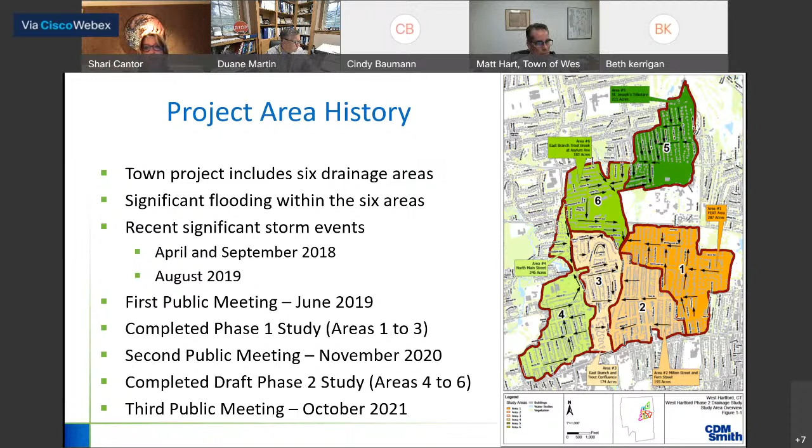This is just the summary of phase 1, which I already presented to you, and I believe most of you were on that presentation. These are areas 1, 2, and 3, and we came up with recommendations here. We conducted field investigations, did stormwater modeling, evaluated alternatives using that modeling, and came up with recommendations.

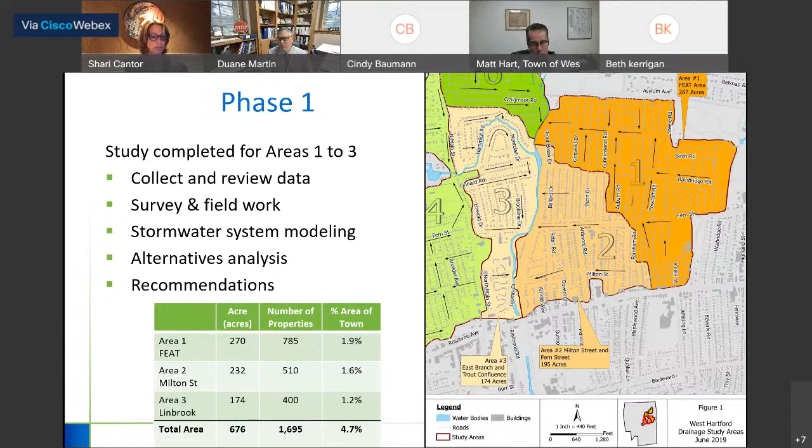Now we're on to phase 2, doing the same scope. We completed the field survey, the modeling, the evaluation of alternatives, and developed recommendations. This phase includes 3 areas.

Area 4 is the area down here to the left, and it includes North Main Street, running down the easterly side of it. It also includes Arundel Ave, Whitman Ave, and Brace Road to orient yourself.

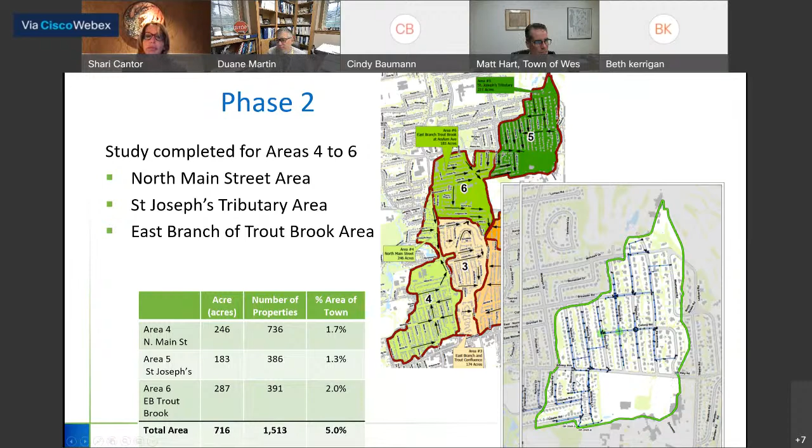Area 5, up in this area, is the St. Joseph's tributary, with Albany Ave running pretty much through the middle of it. It goes north to Mohawk Drive and then south to... I'm forgetting the name of this school, but it goes down towards Lola.

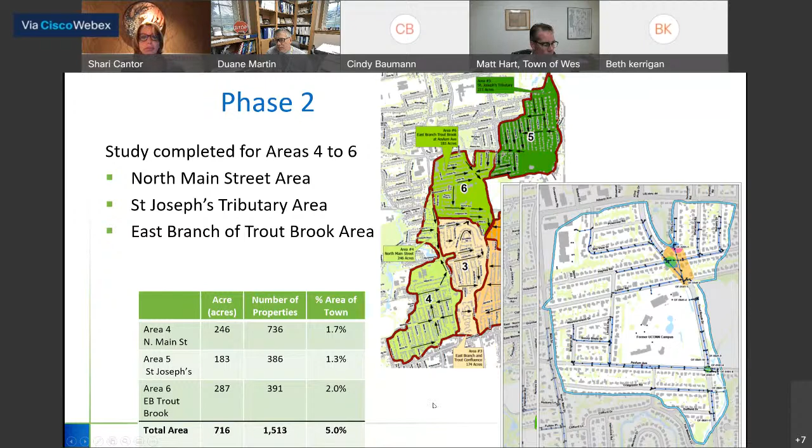Area 6 is from Asylum Ave up to Albany Ave, and it includes Trout Brook Drive, Lindy Lane, Haynes and Lola, and Asylum and Craigmoor. Just to orient yourselves, those are the 3 areas we're focusing on today.

I'm going to go over the existing conditions for this phase 2 study, starting with area 4. Actually, this is area 6. We did the drainage model development, similar to phase 1, performing supplemental survey.

There are 15 drainage systems that discharge to Trout Brook, and this area has a lot of small systems. The red triangles show where they discharge to Trout Brook, the yellow lines represent pipes, and the green junctions typically occur at manholes.

We modeled the 10-year design storm, which has a 10% chance of occurring in a given year. We also validated the models with historical storm events and documented flooding provided by the town engineering department and emergency services.

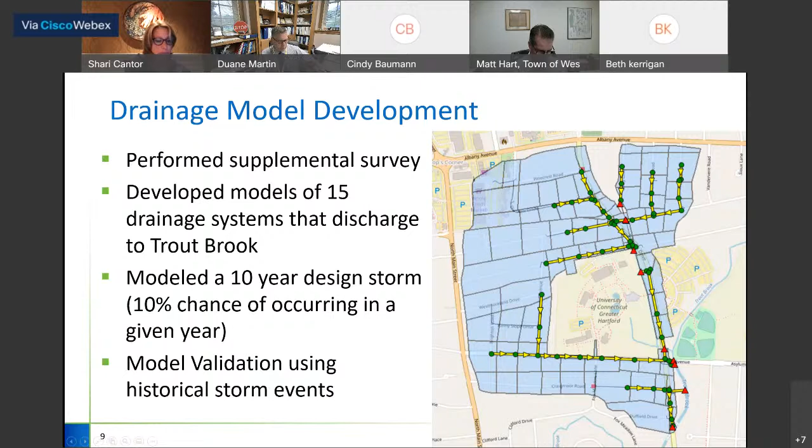Overview of Area 4: it's a total of 249 acres with 4 systems. The North Main Street system is up here, north of where Trout Brook crosses the roadway. Then we have the Linbrook Road system.

The Linbrook system is tiny, including only about 4 catch basins, and it discharges to Trout Brook just east of North Main Street. Then we have North Main Street South, which runs south of Trout Brook. The biggest system in Area 4 is Arundel Ave.

All of this drainage system piping runs in a northerly direction towards Trout Brook. In this figure, going forward, anytime there's a red circle, it means at that node in the system there is flooding.

There is one flow split to mention, where flow comes into usually a manhole and then splits, having the ability to flow from one system to the other. That is identified by the square here, and it happens to be at the American School for the Deaf.

The flow comes down the Arundel Avenue system and splits, continuing down Arundel Avenue but also splitting to the North Main Street South system. There are a few splits as we go along — these are just areas to note, and typically there's modeling complexity at that location.

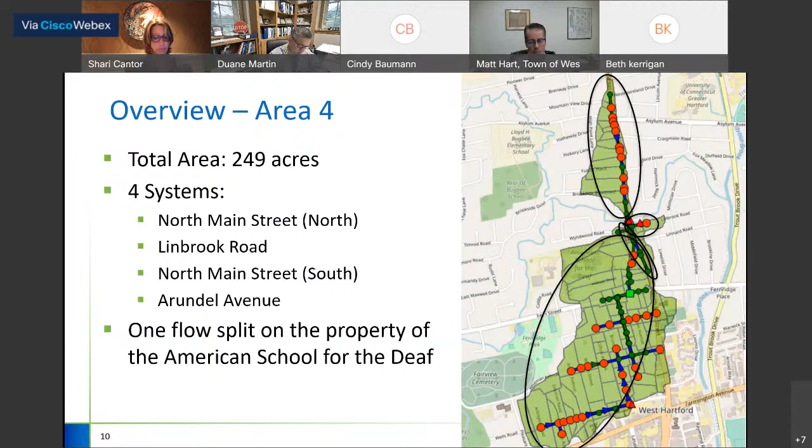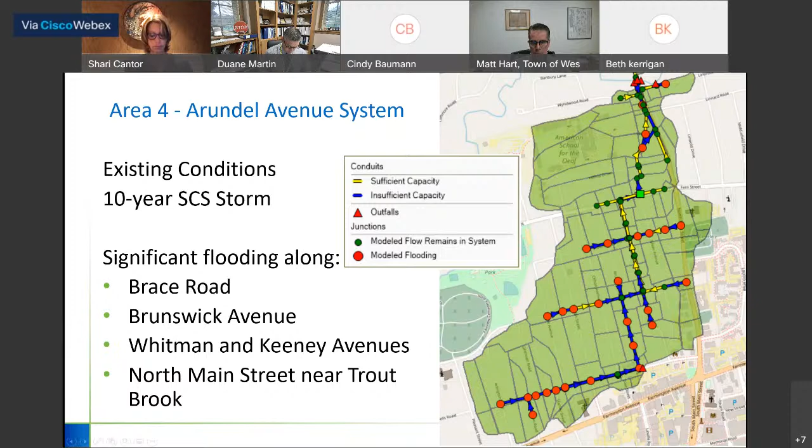So this is the Arundel Ave system. I have noted where there's significant flooding based on the model. As mentioned before, anywhere there's a red dot, it means at that node the water is not in the system—it's actually on the surface. You can see there's quite a bit of flooding within this system, a significant amount along Brace Road, and then also Brunswick Ave, and Whitman and Keeney. A lot of the side streets that are tributary to Arundel Ave have flooding within this area.

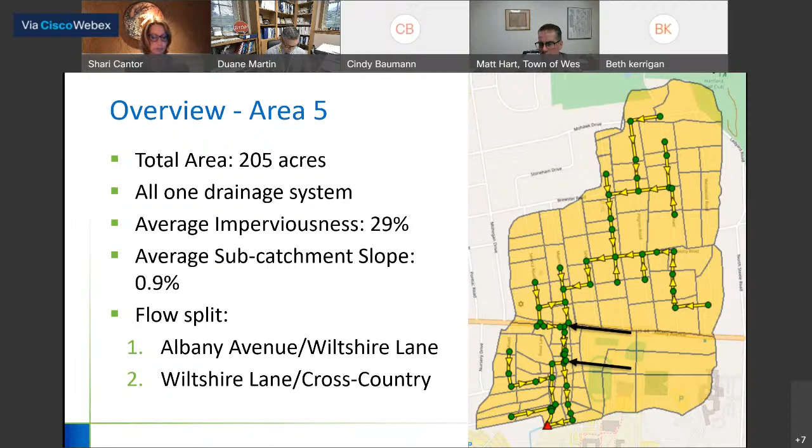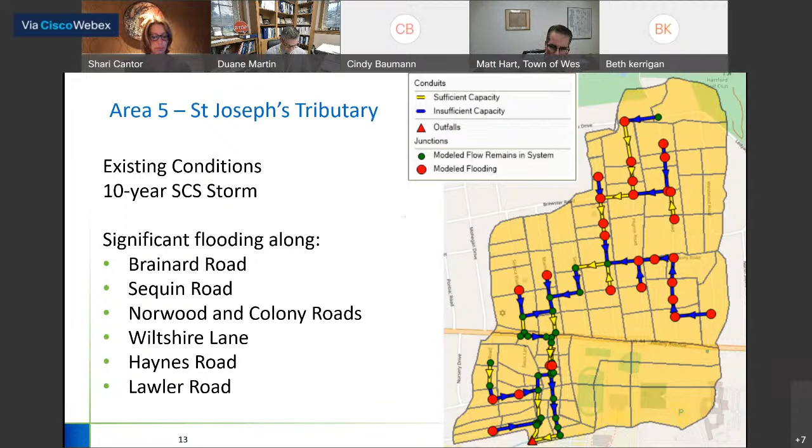So in this area, St. Joseph's Tributary, there's a significant amount of locations where the model showed flooding. Once again, all the red dots are where the water is not contained within the system, and there's flooding documented in the model.

Then Area 6, this is the one that surrounds the University of Connecticut campus. It has Trout Brook Drive running from Albany Ave down towards Asylum and then keeps going a little farther south. There's 10 drainage systems in this area, and this one also has a flow split—another location on Trout Brook Drive where flow splits, and there's actually 2 outfalls for one system.

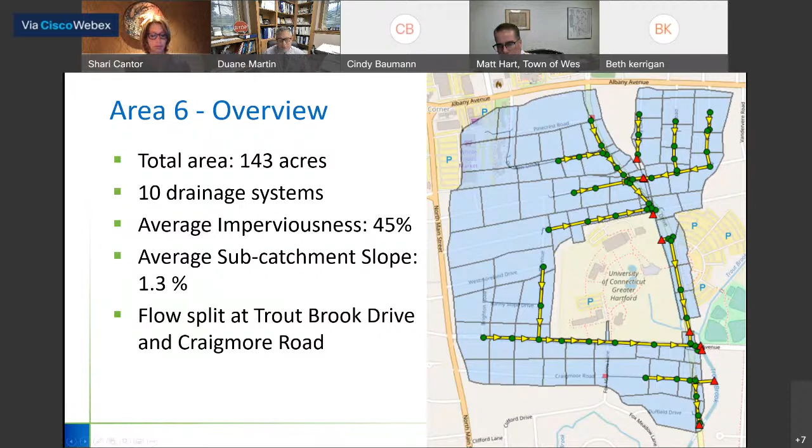This system has a lot of smaller systems and doesn't have as much significant flooding as some of the areas within Area 1 and 2, areas 4 and 5, but there still are a significant amount of red dots, or locations where there is flooding.

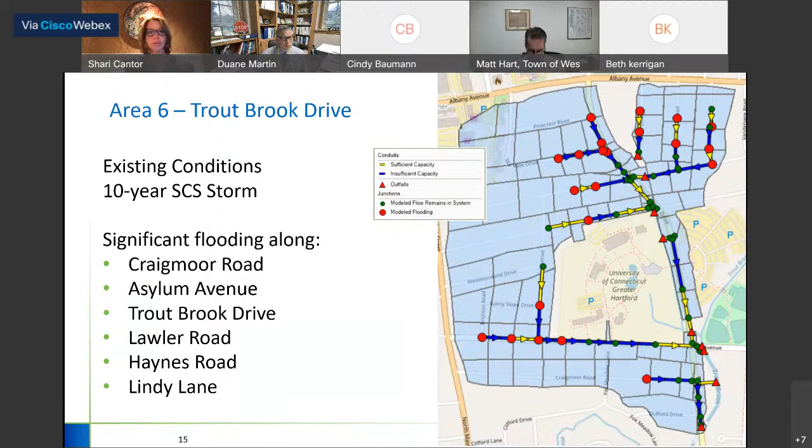Also, I hadn't mentioned, but the yellow pipes are ones that have sufficient capacity, and the blue pipes are ones that have insufficient capacity, so they do not have capacity to carry the flow coming to them.

So now I'll go over areas 4, 5, and 6. All the outfalls and systems within each area are shown in this table. Those that are in bold, though, are the ones that did not have capacity during either the 10-year storm or the 3 historical storms that we modeled. Those that have check boxes to the right are the ones that we then developed recommendations for. The ones that are not bold or do not have check boxes have sufficient capacity and do not currently have any recommendations.

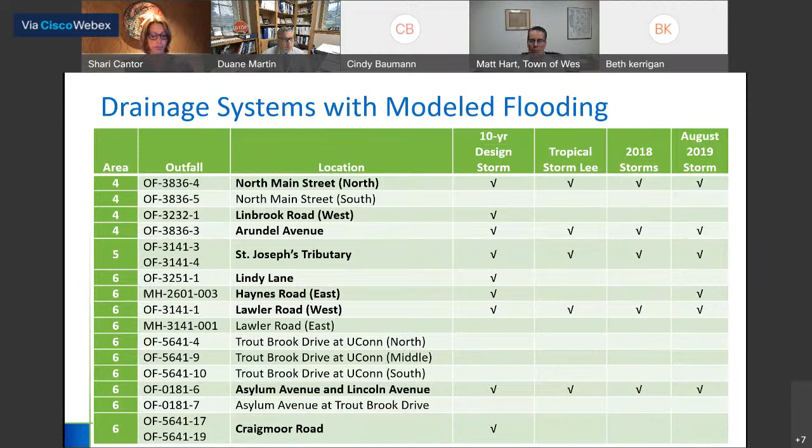So the other thing we looked at for all 3 systems is private inflow removal. As we did in phase 1, we're looking at houses that need a connection for their private inflow so that they can connect it to the drainage system. Within these 3 areas, 4, 5, and 6 for phase 2, there's approximately 600 total buildings that have been identified as private inflow disconnections—those are buildings that would need to be disconnected from the sewer and then put into the drainage system. It's approximately 38% of all the properties within this phase 2 area.

Just to note, in areas 1, 2, and 3, MDC had already conducted the building inspections and already knew all the properties that needed to be disconnected. Within areas 4 and 5, there are portions that have not had building inspections conducted by MDC, so we made an assumption based on percentages in other areas to come up with the anticipated total number of buildings that need to be disconnected.

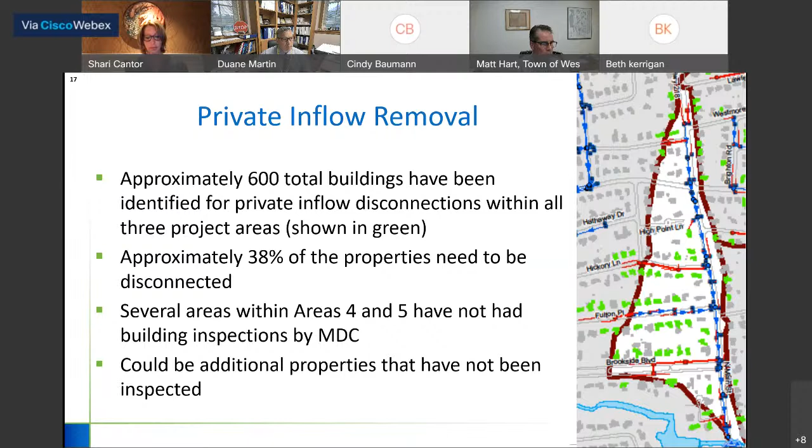And in order to disconnect them, there's a collector drainage system that needs to be installed. This kind of shows you, they've already done this in the Greenhurst Road project. And the blue is actually the drainage system.

What they do is connect to the drainage system with collector drains and then private services. So this is a collector drain on Westbrook Road, which then provides connections for number 44, 46, and 48. And then there's also drain extensions.

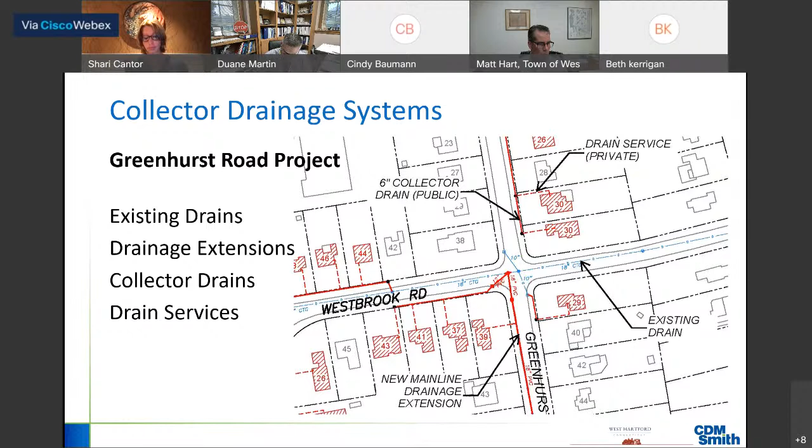In this example, Greenhurst does not have any drainage system down it, so drainage extensions would be provided so that the buildings can tie into those. So collector drainage systems include both drainage extensions and collector drains so that private homes can connect to a drainage system with their sump pumps and roof leaders.

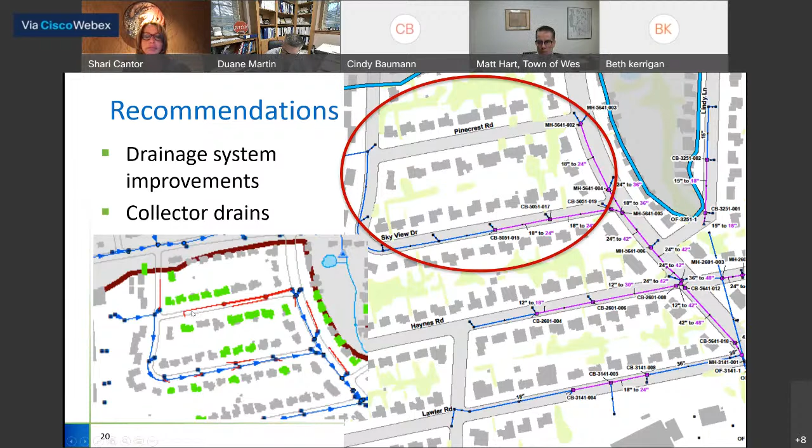For the prioritization, we came up with a tiering system. There are 3 tiers. Tier 1 is the high priority, and these are areas with documented flooding and also modeled flooding during the design storm, which is a 10-year design storm or a 10% occurrence in any year, and also the historical events.

So if you had all 3 of those — documented flooding, insufficient capacity during the design storm, and insufficient capacity during the historical events — then the recommendations were put into a high priority.

And tier 2 is a moderate priority. These are the ones that had modeled flooding only. They didn't have any documented flooding, just modeled flooding during the 10-year and the historical events.

And then tier 3 is the ones that just had modeled flooding during the 10-year design storm. They did not have any documented flooding and did not have any flooding during the historical events. The historical events we modeled were smaller than the 10-year design storm, so that's why they did not show any flooding in the modeling during those storm events.

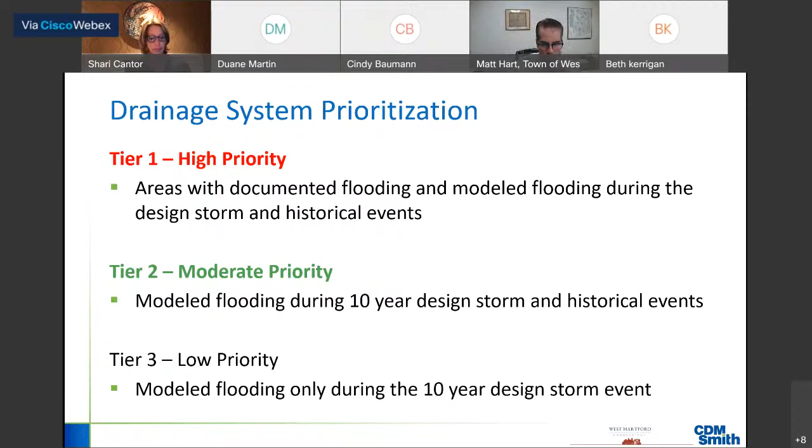So these are the drainage systems with modeled flooding. I had shown you this before, but those with the checks are the ones we're going to go over. North Main Street, Linbrook, Arundel are all in area 4, and then area 5, the large system, St. Joseph's Tributary. There's approximately half of them in area 6 as well: Lindy Lane, Haynes Road, Lawler Road, Asylum, and then Craigmoor.

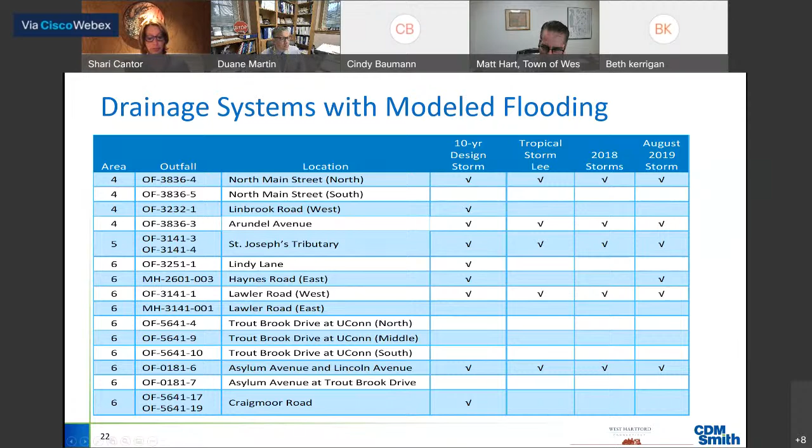So out of those that I just mentioned on the last slide, those that were provided with recommendations are on this slide, and they are prioritized with tier 1, tier 2, or tier 3 based on their performance and their modeled and documented flooding.

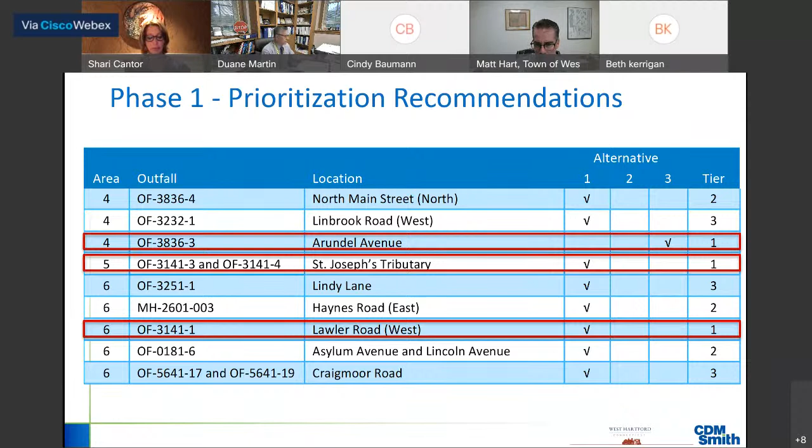So what I'm going to go over, just to pick a few, is there's 3 of them that I'm going to show you the recommendations for and what is proposed in each. I picked one from each area: in area 4, we'll go over Arundel; in area 5, we'll go over St. Joseph's Trib, the large one; and in area 6, we'll go over Lawler Road. Actually, I'm starting with that one in area 6.

So area 6, this gives you an example. You've seen this slide a little before, but this outfall is down near Lawler Road into Trout Brook. On this slide, you can see the drainage network is shown, and anything in blue has sufficient capacity and does not require any upsizing of pipes.

But those lines shown in purple would be ones that were upsized. For example, on Trout Brook Drive here, this first one is an existing 18-inch, shown in black, but the proposed is a 24-inch, to give you an order of magnitude of the size differential from existing to proposed. The table on the left shows the total amount of pipe length as well as the different sizes and pipe length required for the Lawler Road system within area 6.

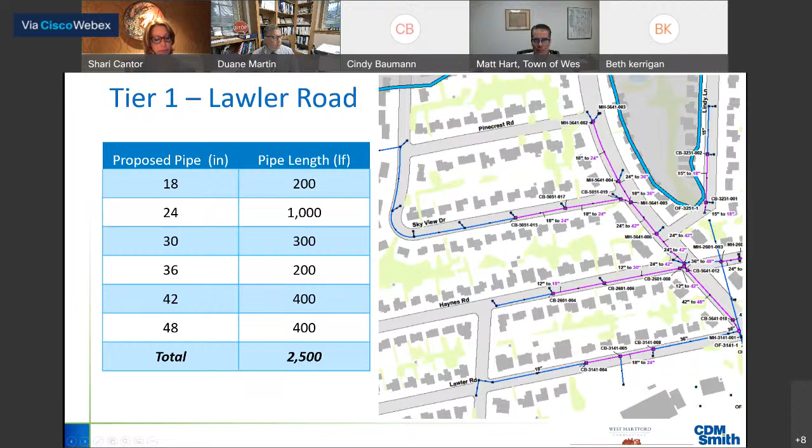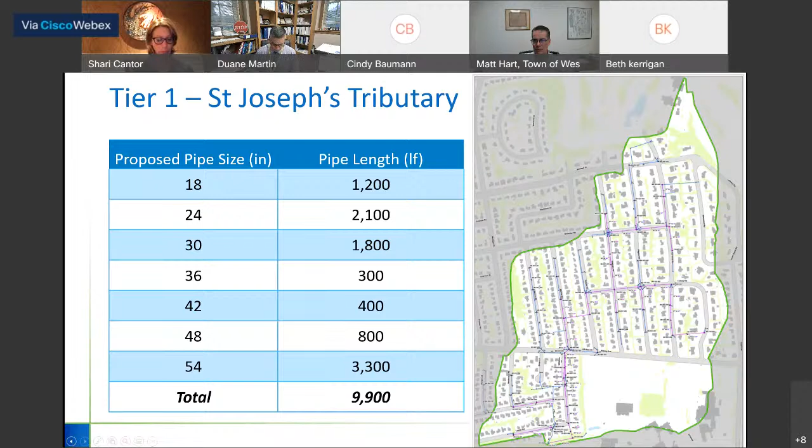And then I took the St. Joseph's Tributary, and I know this is harder to see because it's such a large system. But once again, this is Route 44, and then you have Wiltshire and Lawler Road down near the outfall. This goes all the way up and to the right, and then this is St. Joseph's School. So there are quite a few, and the majority of it is the trunk line. You can see the trunk line is in purple, meaning the pipe needs replacement, and then there are some feeder lines that come in from the side roads that are blue, which would not need replacing. So this area, St. Joseph's Tributary, this system has a total of 9,900 linear feet of pipe replacement, varying in size from 18 to 54 inch.

The last one I've used as an example is in area 4, the Arundel Avenue system, once again a very large system. This system and the St. Joseph's are the largest systems within this phase 2 study, and it's about the same amount of linear feet—10,000 linear feet. You can see Brace Road is down to the south here, and Arundel is in the middle, and this is North Main Street. This is the School for the Deaf, to give you an orientation. But the proposed recommendation, you can see there's blue pipes down here, this is the downstream end because the flow is going from south to north.

But there are quite a few pipes that are tributary to the trunk line. The trunk line runs down Arundel, so all these purple pipes that are tributary to the trunk line need replacing. There's also a lot of documented flooding more up in the Brace Road area and the upper part of the watershed. So this recommendation shows a diversion pipe down towards the river in this area, so we would divert the flow from the upper part of the watershed to the right, to an existing outfall on Trout Brook Drive.

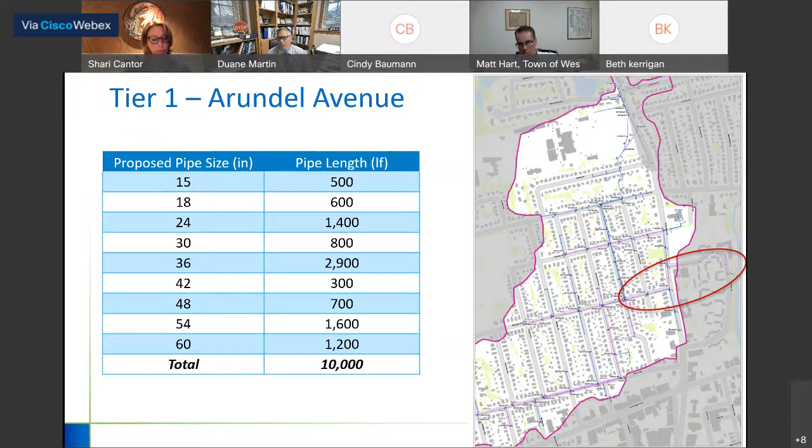So now I'm going to go over some costs, including both phase 1 and phase 2. Phase 1 is areas 1, 2, 3 that we went over about a year ago, and now we have phase 2, which is areas 4, 5, and 6. But I'll start with phase 1. Just to review, to show you what we're recommending for improvements in phase 1, these are areas 1, 2, and 3, listed here with the same kind of tiering system, ranging from tier 1 to tier 3. The total cost is shown at the bottom, $44 million.

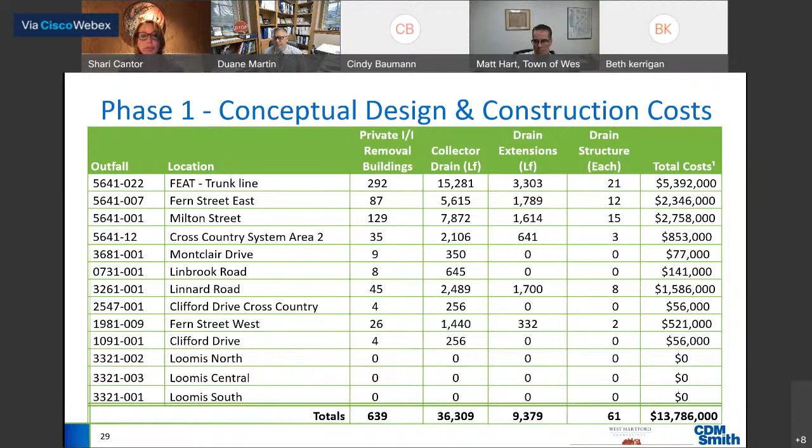This is for the design and construction costs for the drainage systems. Similarly for these systems, there's a cost for the design and construction of the collector drains and the drain extensions, and then also an estimate, which is not shown here, for the private I&I removal. So then phase 2—these are the recommendations in phase 2, and the tiering is shown as well. These are the design and construction costs for all phases 1, 2, and 3. I didn't include a summary of costs here because I'm going to go into more detail on the phase 1, or the tier 1 projects.

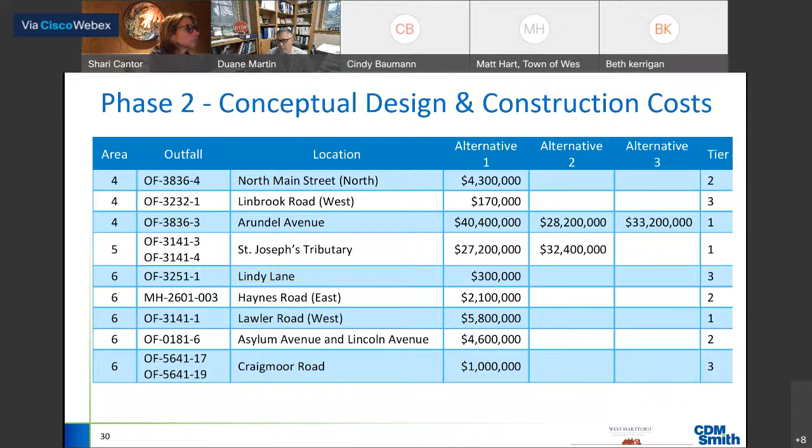The other thing to note is Arundel Avenue, the large system in area 4—we actually looked at 3 different alternatives, priced them out, and we're going with the diversion piping, which is alternative 3. These are the conceptual design costs for the collector drains and drain extensions in areas 4, 5, and 6.

I'd like to go over the prioritization, which includes phase 1, phase 2, and also the original Milone and MacBroom, or the SLR study. Just to give you some background, Milone and MacBroom in 2018 did a study of the brooks along Trout Brook, and this map shows the culvert replacements in yellow. North is to the right, just so you know. You have Asylum Avenue to the left, and then it goes up towards Albany Ave to the right.

So there are culverts to be replaced, and we included these culverts in our prioritization and evaluation for both the phase 1 and phase 2 recommendations. So all the following slides have all 3 combined, all 3 projects. They evaluated 4 culverts, but in the Lindy Lane and Lawler Road area, there's a long culvert, then a junction box, then the culvert under Lindy Lane. So sometimes those are evaluated as 2 culverts, and sometimes as one large system. They came up with recommendations for proposed culverts at Trout Brook Drive, at the UConn pedestrian walkway, the Lawler, Haynes, and Lindy area, and also Albany Ave.

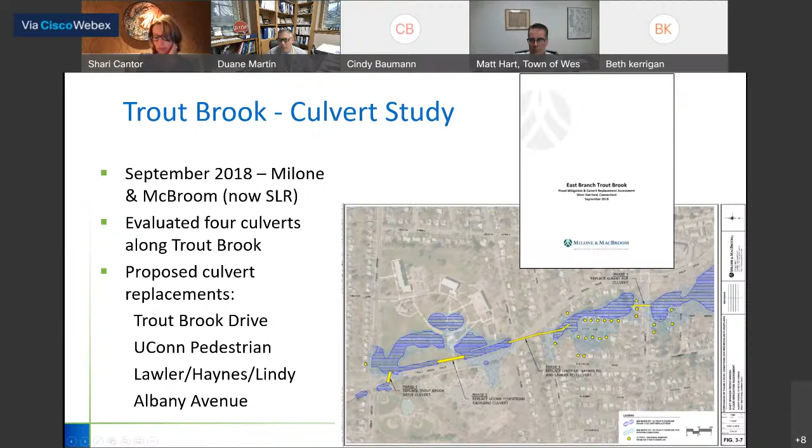But this gives you an overview of all the costs associated with all the tier 1 projects in phase 1, phase 2, and the culvert study. To show you where all these are, since you might not know, I produced a map.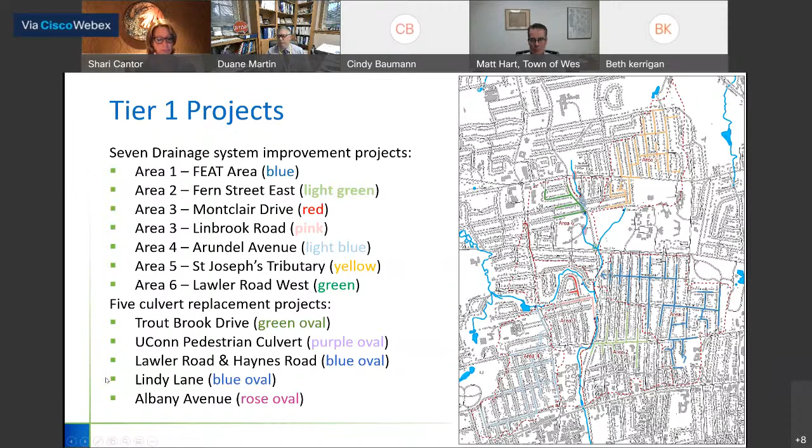Now I want to move on to an overview of the groundwater study. In phase 1, we included a groundwater assessment, reviewing historical information and determining depth of groundwater. As presented in phase 1, there is a significant groundwater issue in area 3.

There are approximately 85 houses within area 3 that have groundwater within 5 feet of their surface, and an additional 90 houses with groundwater within about 10 feet of their surface. Area 3 has been identified as a regional low elevation point with high groundwater depths.

So we are doing a groundwater study to monitor groundwater in that area and look at how the groundwater in the subsurface moves, and whether it would be beneficial to implement some kind of groundwater collection system to help alleviate the groundwater issues in that area.

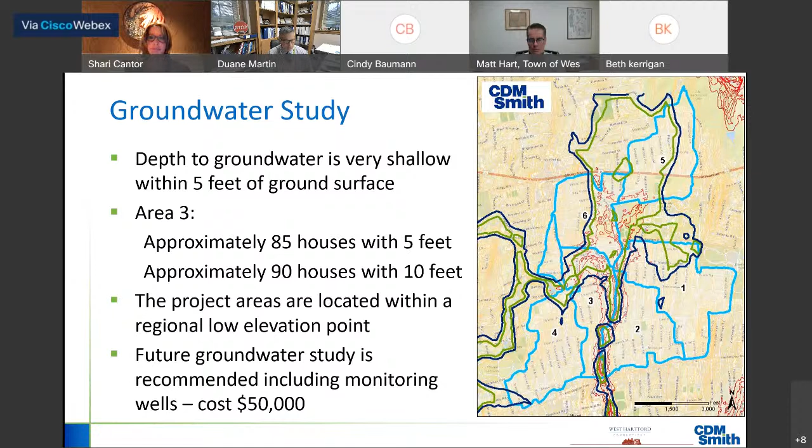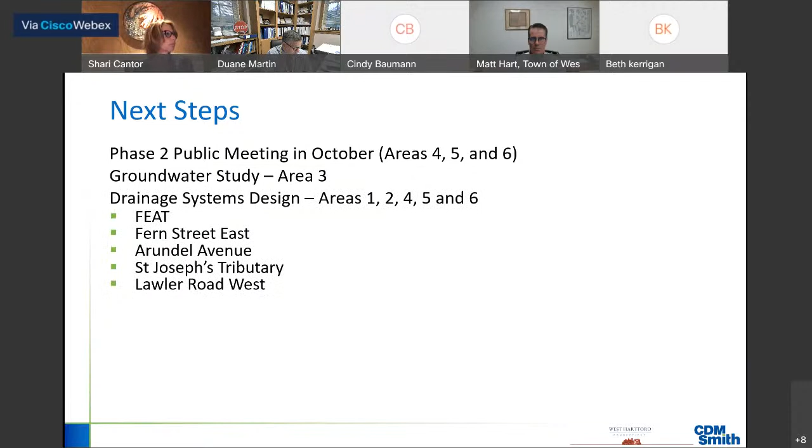Now for the next steps: we're going to have a public meeting in October for phase 2, covering areas 4, 5, and 6. The groundwater study, which I mentioned, has started for area 3. We also have the drainage system design for the tier 1 systems, in areas 1, 2, 4, 5, and 6, which we hopefully will move forward with.

And then also the culvert replacements along Trout Brook. It's recommended that you always start downstream to upstream, so the two highest priority culverts are Trout Brook Drive and the UConn pedestrian culvert.

And then the grant funding opportunities, we continue to look into that. And then also we continue MDC coordination for the house inspections and the collector drains. And so that is the end, and I will open it now to, or return it to

The mayor, and she can, I'm sorry, Shari. That's okay. No, that's Cindy. That's fine. Thank you very, very much. I'm going to actually go back to either Matt, and then I'm sure I have some questions. So I don't know, Matt, if you want to kind of close on it? Just sort of transition, or if we should just start with questions. I don't know if you have anything further.

Thank you, Mayor. Matt Hart, Town Manager. It looks like Mr. Martin wants to make a comment, but just before I turn to him, obviously this is a very complex issue and project. This was a lot of information for you to digest. I think it's a front burner issue for the town. It's going to continue to be one for the next several years. I imagine we're going to be discussing it with this committee on a very frequent basis.

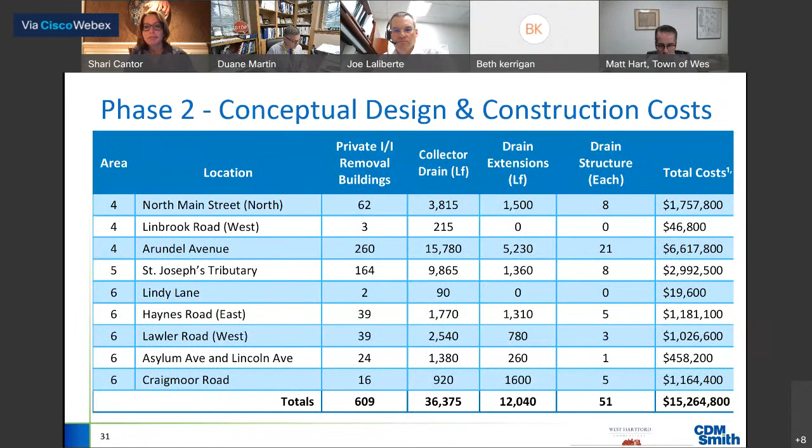All right, so I'm sure that when we go through our community outreach, there's going to be a lot more specific questions from residents on how this will impact them, and obviously the prioritization as we go, because I think that's what everybody is concerned about, especially when you're talking about a long-term project.

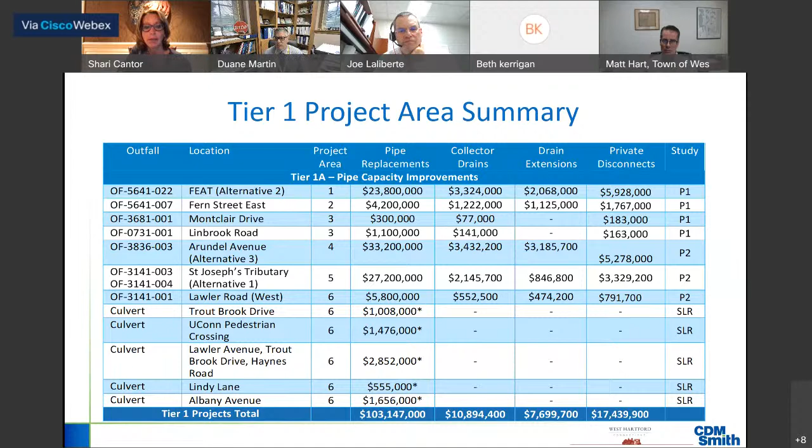All right, so let's just go through the next steps again, and the time frame on those. I think we had a general, maybe Matt can talk about the time frame on those, and then we can wind up this meeting.

Thank you, Mayor. Matt Hart, Town Manager. Let me start off and then turn to Mr. Martin to add to my comments. So we do need to present the results of this study to the public. We're planning to have the public information session next month. Then also CDM Smith is engaging in the groundwater study for Area 3, as discussed.

And then we would begin design for the areas that they have noted here. On a parallel track, while we're working on the design, we would continue our conversation with the MDC, and our goal is to come to an agreement, a memorandum of understanding in terms of how we would handle the disconnect from the sanitary sewer and then the connection to the stormwater line, the cost sharing approach that Mr. Martin and I talked about. We'll be having that conversation with the MDC.

We've already begun that. Something else I think we will be focused on in the year ahead is establishing a stormwater utility, pursuing the grant opportunities in collaboration with the MDC, as Mr. Laliberte discussed as well. In terms of the time frame to complete the design, I would need to defer to Mr...